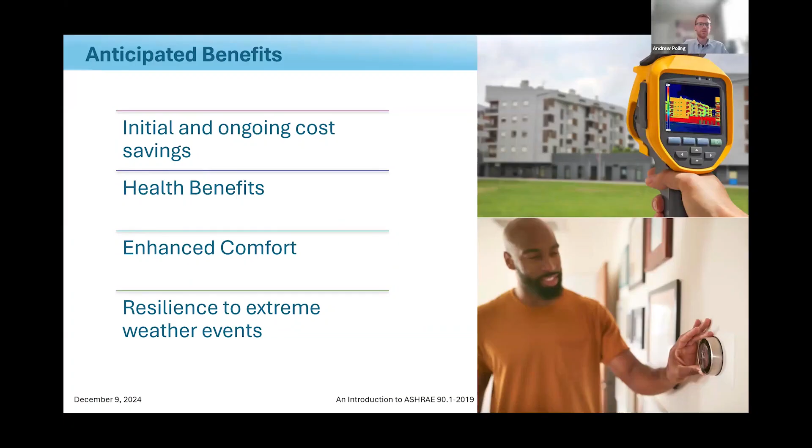Here we have the estimated savings for ASHRAE 90.1 2019. This standard is 22.5% more efficient than the 2007 standard, which was HUD's previous requirement. In aggregate, energy savings are estimated at $1.1 million per year, or up to $53 million over the 30-year life cycle.

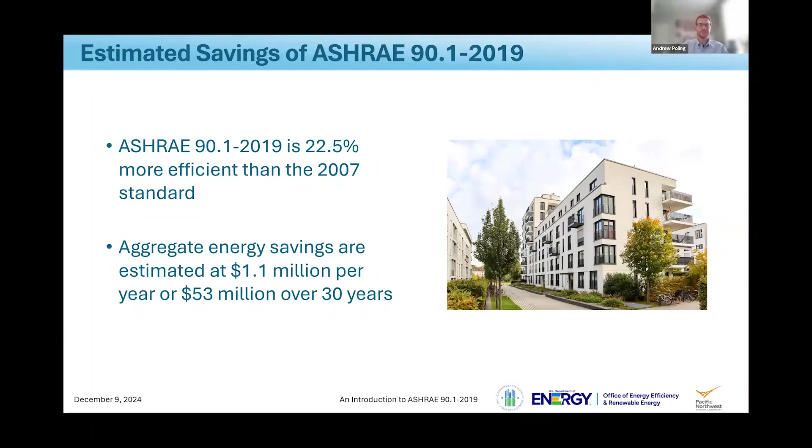Alternative compliance pathways - we're also looking into and going to release a list of alternative compliance pathways to meet this standard. Industry is already building to standards that meet or exceed the 2021 IECC or ASHRAE 90.1 2019. Programs such as the low-income housing tax credit qualified allocation plans often require or incentivize high-performance building standards, and then the IRA tax credits, which are available, reference building and require building to Energy Star program requirements or certifying to Department of Energy's Zero Energy Ready Homes program. So HUD and USDA will be publishing a list of high performance building standards that are accepted as alternative compliance pathways.

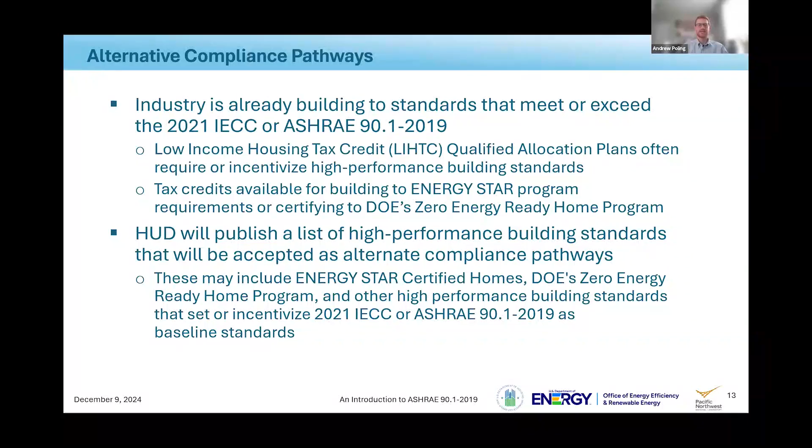Next, differences in state code adoption and HUD requirements. On the right, a U.S. map appears with a key labeled code efficiency category. Here we have a little bit on state code adoption and how it relates to the HUD requirements. Codes are adopted at the state or local level, and states often include amendments when adopting codes. This map, developed by the Department of Energy, shows the code efficiency category of each state's adopted code and takes into account any weakening or strengthening amendments that a state might have included to the unamended standard.

So this map shows which versions of the ASHRAE 90.1 standard states have adopted, taking into account impacts of weakening or strengthening amendments. We have 14 states that currently are at the 90.1 2019 version, plus the District of Columbia.

Just to walk through an example, I want to take Ohio, which has adopted the ASHRAE 90.1 2019 standard, however has done so with some weakening amendments. As a result, this map shows it as equivalent to the 2016 standard. In that case, the state code would not be seen as an equivalent performance level to the HUD and USDA requirement, so projects need to be building to that unamended ASHRAE 90.1 2019, or at least its equivalent performance level.

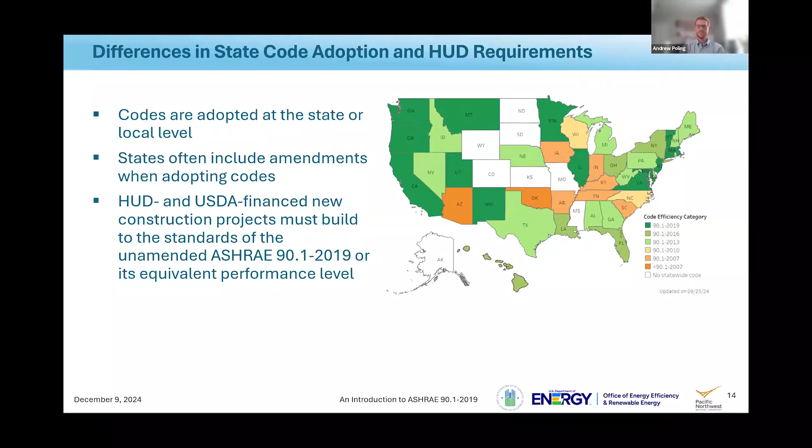So let's dive right in. DOE Building Energy Codes Program - a little bit of background on DOE's Building Energy Codes Program, which is the program I primarily support here at PNNL. It is funded by the Department of Energy, and the mission is to support building energy code development, adoption, and implementation to achieve the maximum practicable cost-effective improvements in energy efficiency while providing safe, affordable, and healthy buildings for occupants.

To achieve this mission, the Building Energy Codes Program's directive is to participate in development of energy codes, establish methodologies, and issue determinations to confirm energy codes result in energy savings, promulgate standards for federal buildings, and provide technical assistance to states and jurisdictions to implement their energy codes.

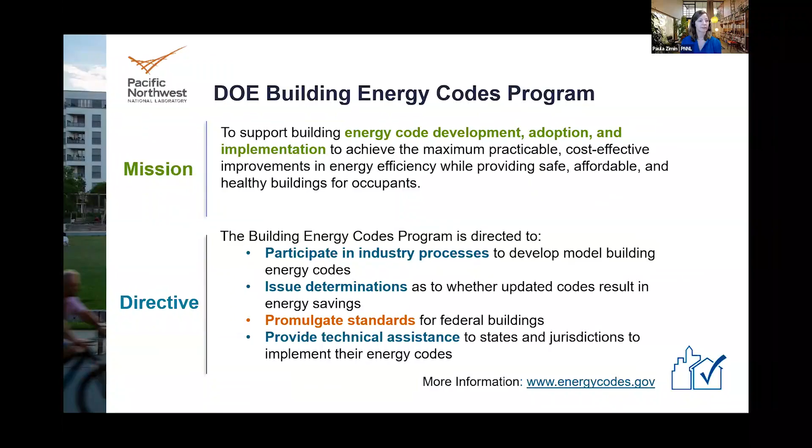What are energy codes? For those who don't work with energy codes as much as I do, you may be wondering what they are and how they relate to HUD's change in minimum energy standards. At their basic level, energy codes set requirements for minimum levels of efficiency for buildings and homes. They are adopted by states and/or individual jurisdictions along with other building codes. There are two predominant building energy codes in the US: ASHRAE Standard 90.1 and the IECC. Both codes are updated on a 3-year cycle.

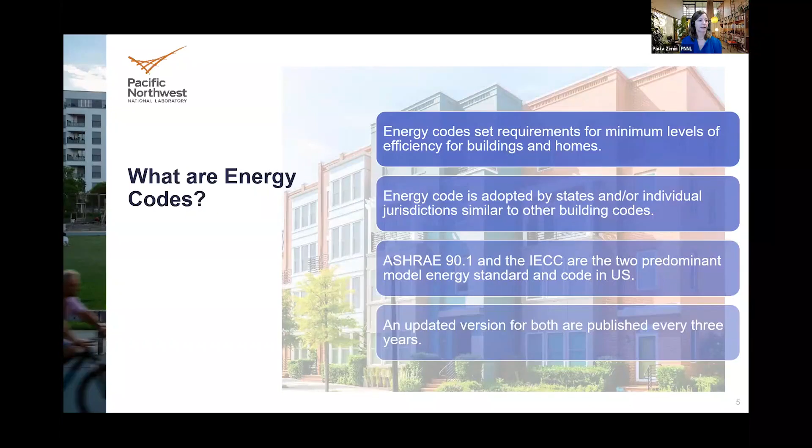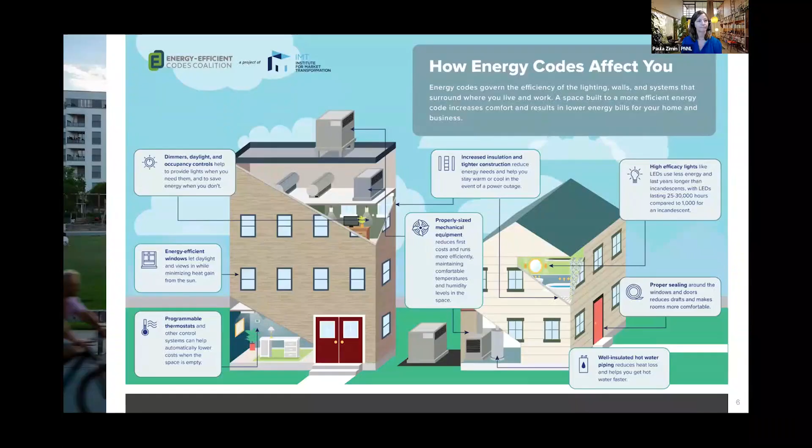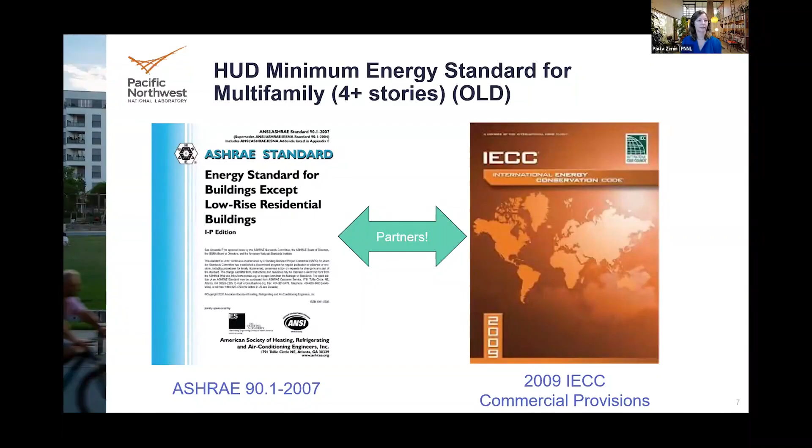The new HUD minimum energy standard is now Standard 90.1 2019 for multifamily buildings 4 stories or more. The partner energy code is the 2021 IECC, and as Drew mentioned, HUD will accept the 2021 IECC in place of 90.1 2019 since they're comparable energy codes.

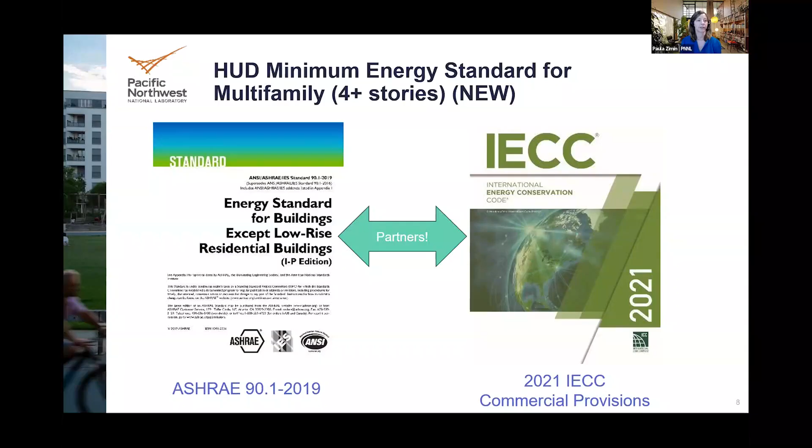Developers and contractors in states or jurisdictions whose energy code is older than the 2021 IECC or ASHRAE 90.1 2019 will need to become familiar with the differences of their local energy code, and we hope this overview can help with those larger changes.

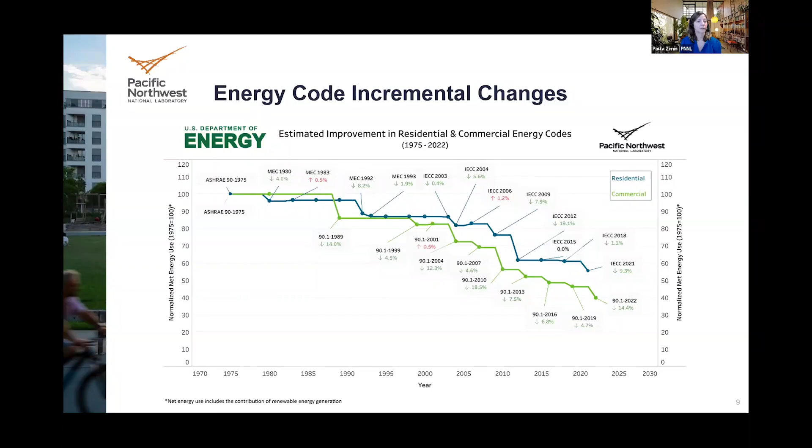The previous HUD minimum energy standard for mid-rise and taller multifamily buildings was ASHRAE Standard 90.1 2007. The net average energy use reduction across all commercial construction, not just multifamily, was 69.

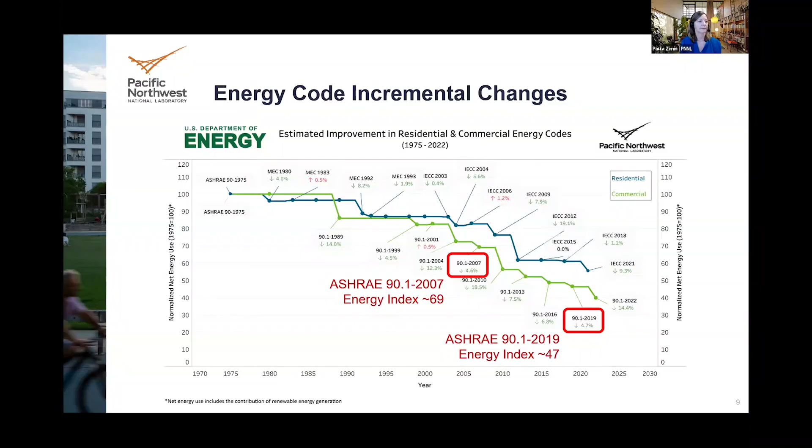A second red highlight appears. The new HUD minimum energy standard for mid-rise and taller multifamily buildings is ASHRAE Standard 90.1 2019. The net average energy use reduction across all commercial construction is approximately 47. So across all commercial construction, this is approximately a 30% reduction between the two standards.

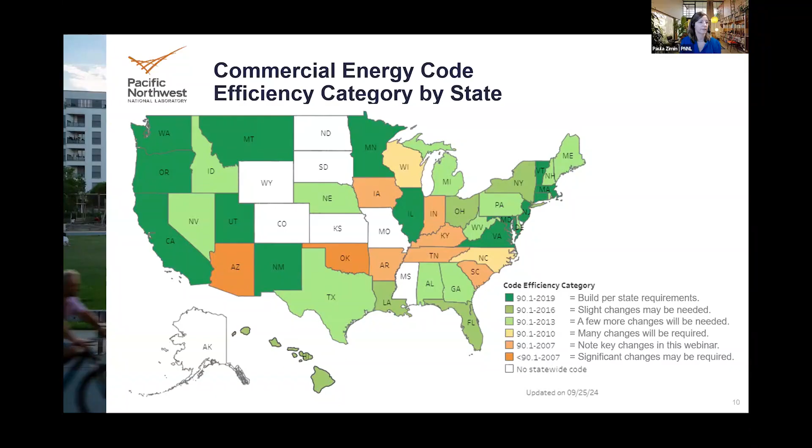States in yellow and orange will need to make more significant changes to comply with the new HUD minimum energy efficiency requirements. Yellow states include Wisconsin and North Carolina. Orange states include Arizona, Oklahoma, Arkansas, Iowa, Indiana, Kentucky, Tennessee, and South Carolina.

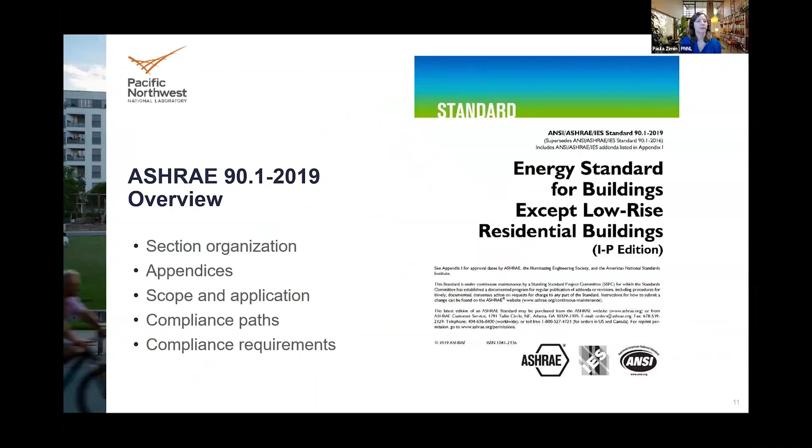ASHRAE 90.1-2019 Overview. All right, now we're going to focus more in on ASHRAE Standard 90.1 2019 specifically, and changes specific to section organization, appendices, scope application, compliance paths, and compliance requirements.

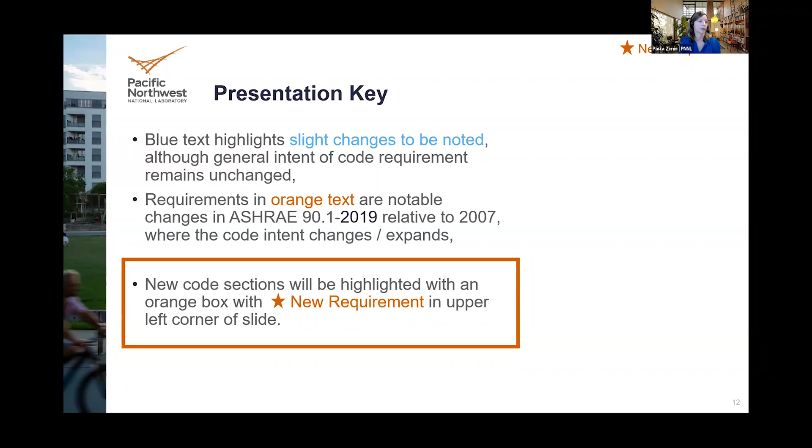So we can follow along in that way. No change in section organization. The organization of the main sections of ASHRAE 90.1 have not changed between the two versions. Sections 1 through 12. A box highlights system sections 5 through 10. Each section is maintained, and there's no significant changes, although I'll get into more detail about the system section changes relative to building envelope, heating, ventilation, and air conditioning, service water heating, power, lighting, and other equipment.

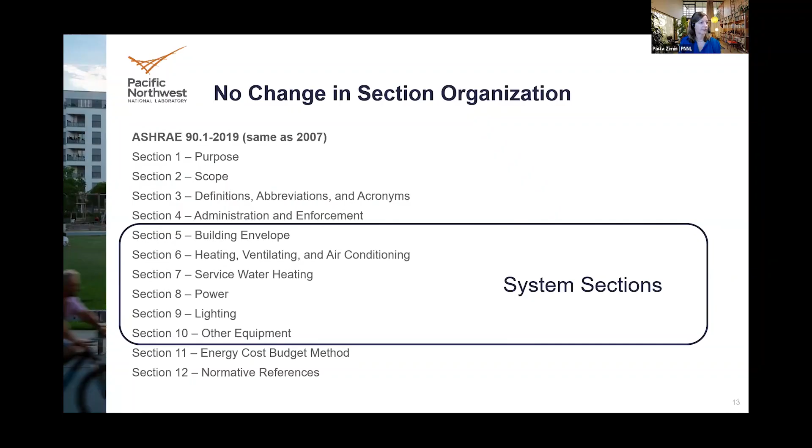Organizational changes and appendices. Although the main sections haven't changed, the standard's appendices have been rearranged a little bit. Appendices B and D previously discussed building envelope climate criteria as well as climate data, which is often referenced, and we'll reference that information in a little bit. But starting with the 2016 standard, ASHRAE replaced these appendices and started referencing an annex, which references ASHRAE Standard 169, which is the climate standard for ASHRAE.

Appendix F in the 2007 standard was updated and shifted to Appendix I in the 2019 standard, which just includes the detailed list of changes between the 2016 version and the 2019 version.

Paula sips from a water glass.

I'm speaking too fast. All right, and then there's two new appendices, Appendix F, which lists DOE's minimum efficiency requirements, and Appendix H, which provides additional guidance for verification, testing, and commissioning, which we'll talk about also in a little bit, new requirements.

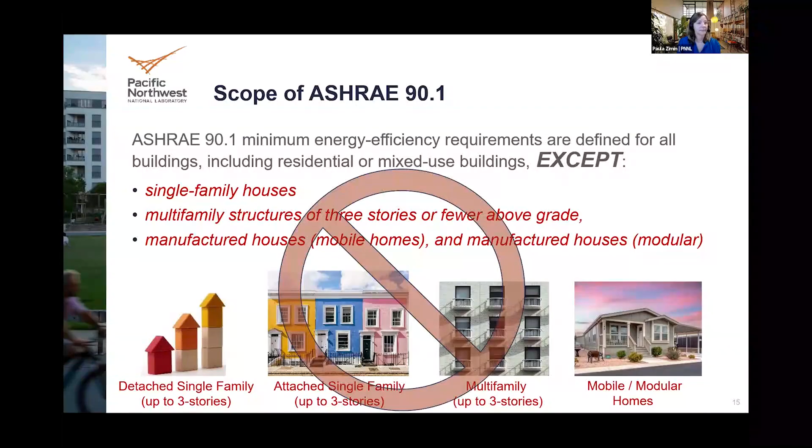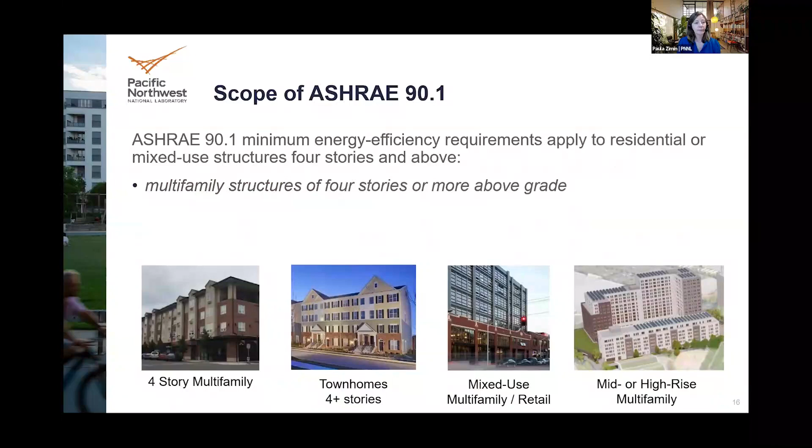Scope of ASHRAE 90.1. One important thing to note before we go any further is what ASHRAE 90.1 does not cover. ASHRAE 90.1 is a commercial building standard. It covers all buildings, including residential buildings, except for residential buildings that are single family, multifamily, 3 stories or less, or manufactured housing. So when I refer to residential buildings today or multifamily buildings, I am not referring to any of these building types: detached single family up to 3 stories, attached single family up to 3 stories, multifamily up to 3 stories, mobile or modular homes. When I refer to residential buildings or multifamily buildings today, I'm referring to any of these building typologies: 4 stories or more multifamily, mixed-use multifamily 4 stories or more, and the more obvious mid- or high-rise multifamily buildings.

ASHRAE 90.1 2019 Compliance Summary. A flowchart appears, labeled with the text, choose one compliance path. Okay, so for compliance with the standard, the structure hasn't really changed, but there are 2 key additions that we should highlight. Compliance, enter at section 4.2.1. First, all projects must comply as prescribed at the system level. That's step 1, section 5.2 through 11.2. And all projects must comply with mandatory provisions defined for each system, section 5.4 through 11.4.

This is the same as the 2007 standard. The first key change is that Appendix G, which is the performance rating method broadly used for above-code programs such as utility incentive programs or Energy Star, can now be used to show performance compliance with ASHRAE 90.1. The second significant change is a new requirement for verification, testing, and commissioning, an expanded concept from the 2007 standard, but now applies to each and every system regulated by the standard.

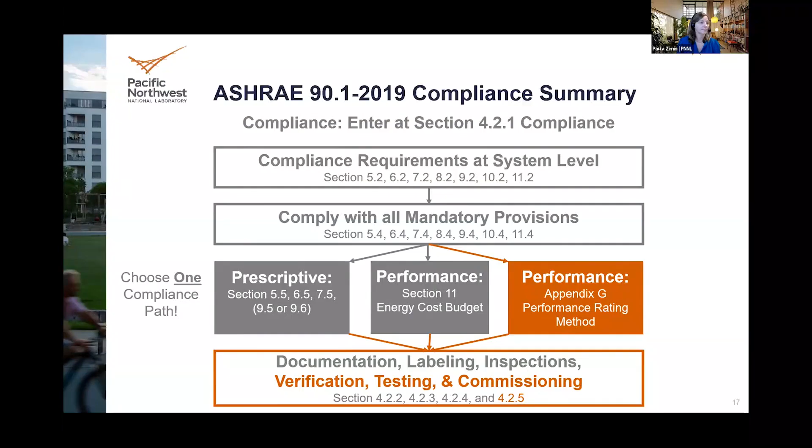Section 4.2.5 appears in orange.

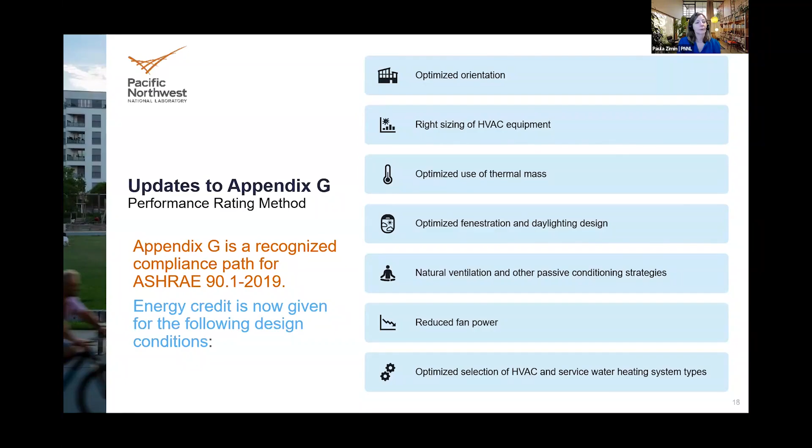A little bit more about the updates to Appendix G. Appendix G is not a new appendix, and it has been used by above-code programs since the early 2000s. However, Appendix G has gone through a reorganization since 2007, and there are now new ways to claim additional energy credit. Some examples include optimized orientation, right-sizing of HVAC equipment, optimized use of thermal mass, optimized fenestration and daylighting design, natural ventilation and other passive conditioning strategies, reduced fan power, and the optimized selection of HVAC and service water heating system types. In previous versions of ASHRAE 90.1, credit for these conditions was limited.

New verification, testing, and commissioning requirements, section 4.2.5. This is a new compliance section requiring verification, testing, and commissioning across all system types, further detailed in each building system section, 5.9.1 through 10.9.1. Each building system section defines specific requirements for verification, testing, and commissioning, and these are required regardless of the compliance path chosen, whether the prescriptive path or one of the two performance path options. Each performance path option also lists verification, testing, and commissioning requirements, 11.2d and G1.2.1c.

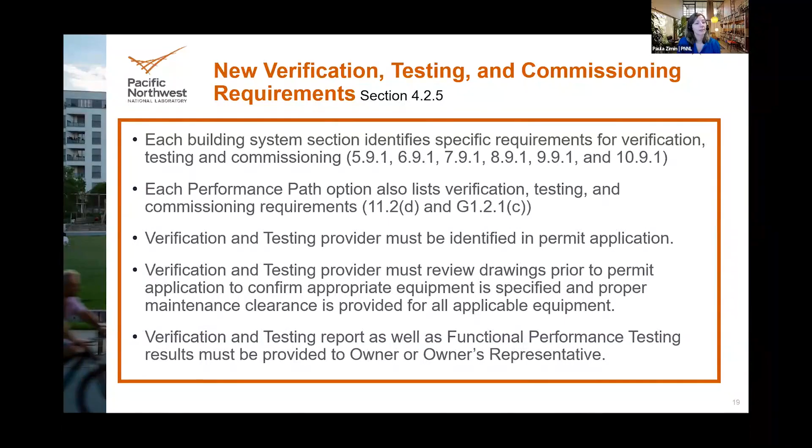The verification and testing provider must be identified in a permit application. This third party should have been involved during design to review the drawings prior to permitting, confirming appropriate equipment is specified and proper maintenance clearance is provided for all applicable equipment. Finally, a verification and testing report, as well as functional performance testing results related to commissioning work, must be provided to either the owner or the owner's representative.

New compliance documentation requirements, section 4.2.2.3, manuals. Finally, there is also an expanded documentation requirement related to operation and maintenance manuals. In previous versions of the standard, operation and maintenance manuals were only required for HVAC systems and power systems. Regardless of which compliance path, ASHRAE 90.1-2019 explicitly requires O&M manuals for each building system regulated by the standard. The manuals should meet industry standards as identified by references specific for each section identified in Appendix E.

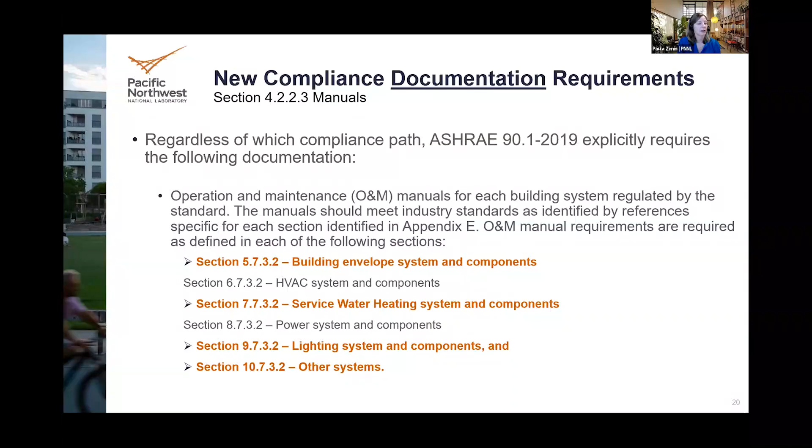Now, operation and maintenance manuals are required for all other systems, including the building envelope, service water heating, lighting, and other systems regulated in Section 10. Operation and maintenance manuals are invaluable to building operations and facility managers, particularly with turnover of staff and succession. We want to keep track of required operation and maintenance processes and a clear list of replacement details for ongoing efficient operation of the building.

In Section 5, for building envelope, there's a new requirement for a continuous air barrier as well as leakage testing, along with updates to vestibule requirements and prescriptive R-value and U-value updates.

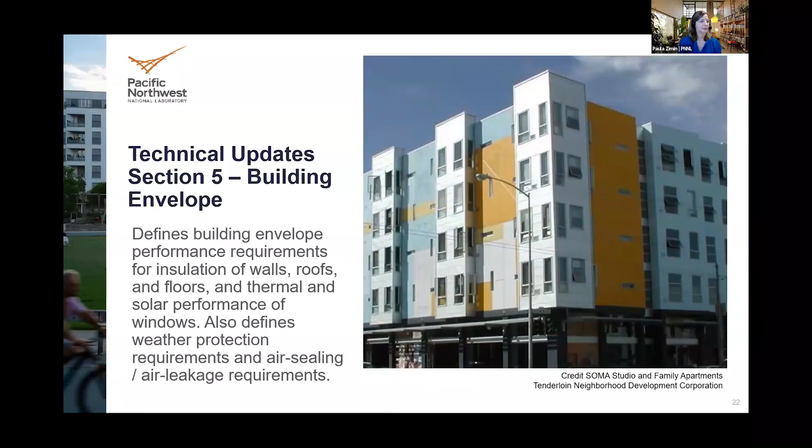5.4.3.1 Continuous Air Barrier, previously Building Envelope Sealing. A key subsection that has changed pretty significantly is the air leakage section. The previous building envelope sealing subsection has been renamed Continuous Air Barrier.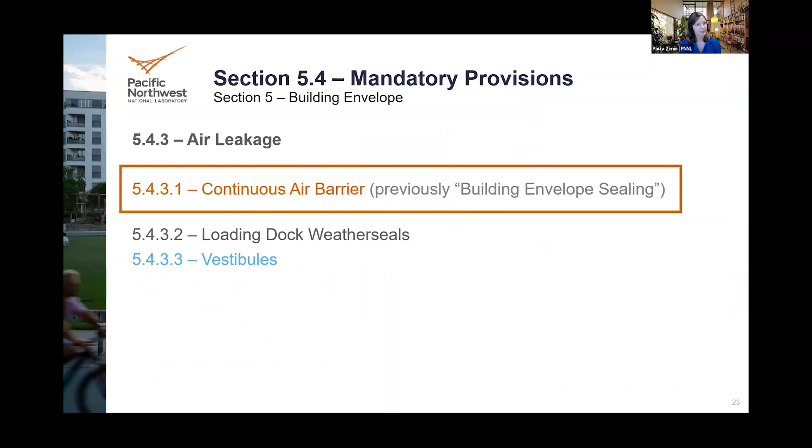Loading dock weather seal requirements are largely the same, but there is an update to the vestibule requirements. So let's take a look at that. Continuous Air Barrier Section

In the 2007 standard, building envelope sealing was prescriptive, specific to sealing at joints and junctions and other building envelope penetrations. The new continuous air barrier subsection specifically requires an air barrier component within each of the building envelope assemblies, as well as continuous transition at openings and intersections.

Further, there must be an overlap where the air barrier material changes, and the air barrier must resist all building pressures, either from the exterior or interior. In this way, no one material can be relied upon to be the air barrier.

One way a design team can design a continuous air barrier is to draw a continuous line around a building section representing the air barrier system, as shown with the green line in this building section. At each intersection of different components, such as at building overhangs, window openings, or roof transitions, the details in these locations should show what components make up the air barrier and how they will overlap to maintain continuity.

https://www.swinter.com/about-us/news/news-item/air-sealing-guides. The 2019 standard maintains the majority of the 2007 standard's prescriptive sealing requirements at joints and junctions. In the continuous air barrier design and installation section, the requirements are slightly modified to better integrate with the continuous air barrier requirement.

Text: E. The following areas of the continuous air barrier in the building envelope shall be wrapped, sealed, caulked, gasketed, or taped in an approved manner to minimize air leakage. 1. Joints around fenestration and door frames. 2. Junctions between walls and floors, between walls at building corners, and between walls and roofs. 3. Penetrations through the continuous air barrier in building envelope roofs, walls and floors. 4. Building assemblies used as ducts or plenums. 5. Joints, seams, connections between planes and other changes in continuous air barrier materials.

There are several available resources online to help understand multifamily whole building air sealing at the component level, as well as translating this to a continuous air barrier system. This example was prepared by an energy consulting firm, Steven Winter Associates.

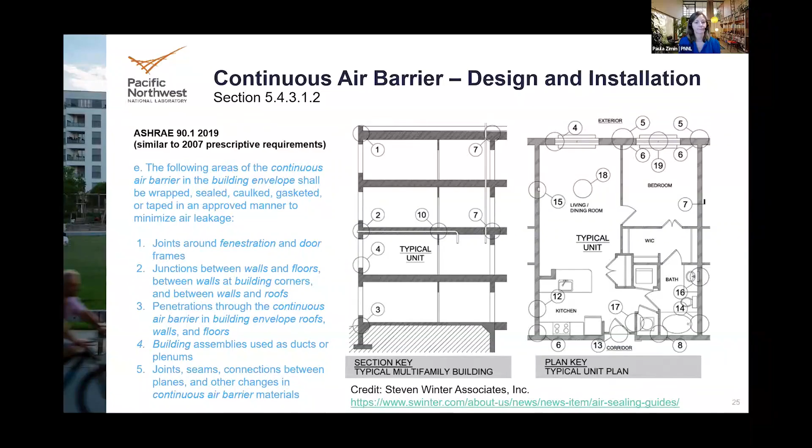They have prepared air sealing guides for 3 different multifamily construction types: masonry, steel, and wood construction, which cover common air sealing details found in the multifamily building typology. This link and other air sealing guides will be provided in a consolidated resource page at the end of this presentation. Whole building air leakage, section 5.4.3.1.1.

The new continuous air barrier subsection also requires testing of the system to confirm the installation achieves the intended performance. This is essentially one step in commissioning the continuous air barrier system. Testing of the continuous air barrier system is required in all climate zones.

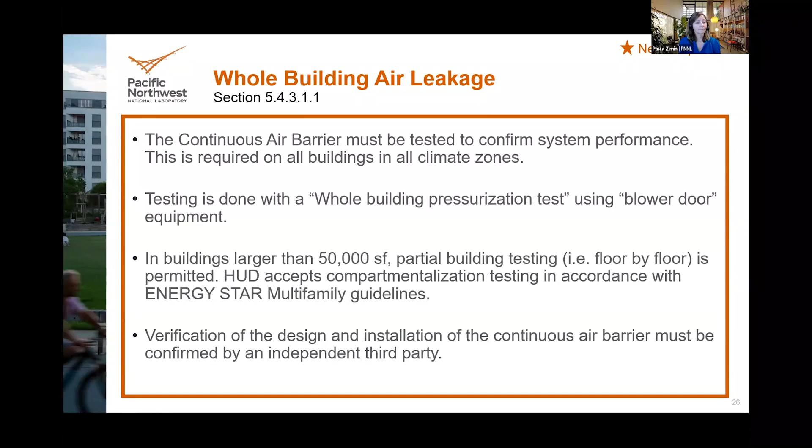Testing is conducted with a whole building pressurization test using blower door equipment. In buildings larger than 50,000 square feet, partial building testing, such as floor by floor, is permitted. HUD also accepts compartmentalization testing in accordance with Energy Star multifamily guidelines. The design and installation of the air barrier must be inspected and tested by an independent third party.

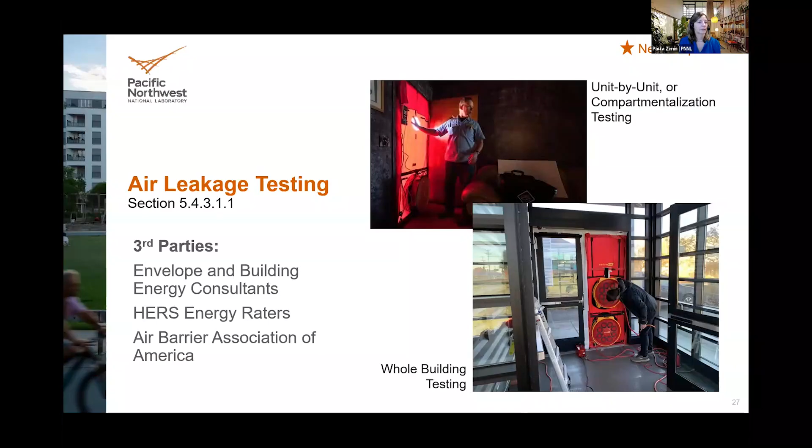The upper photo is set up in a dwelling unit. This testing is considered unit by unit or compartmentalization testing. The lower photo is a setup in the entrance to a building and is testing the air leakage of the whole building. Section 5.4.3.3, Vestibules and revolving doors, section 5, Building envelope.

Vestibules and/or revolving doors are required at building entrances. Building entrances include any doorway, set of doors, revolving door, vestibule, or other form of portal that is ordinarily used to gain access to the building or to exit from the building by its users and occupants.

The vestibule section has been updated to include revolving doors. The fundamental requirement has not changed. It's just that ASHRAE 90.1 recognizes that revolving doors achieve the same energy or equivalent energy savings as a vestibule.

Vestibules and/or revolving doors should be used at all building entrances. Building entrances include any main access point ordinarily used by regular occupants or visitors to access a building. The key change for a multifamily building is that vestibules or revolving doors are now required in all climate zones, no exceptions.

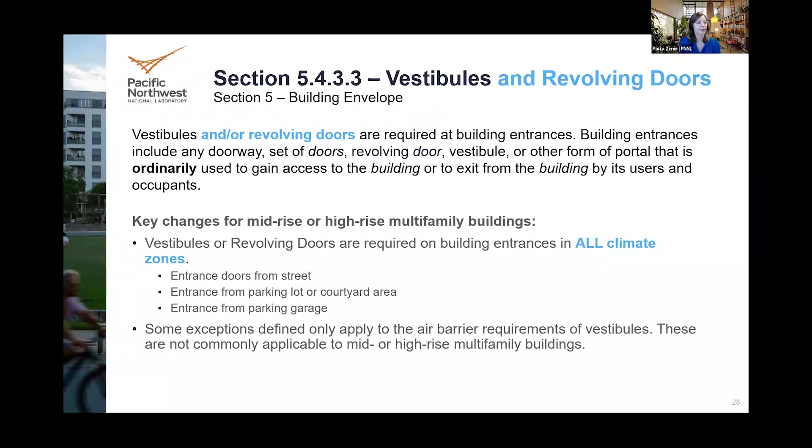Building entrances can include the main entry door from a street, potentially a back entrance from a parking garage or courtyard area, and entrances from a parking garage, perhaps to an elevator lobby. Some exceptions defined only apply to the air barrier requirements of vestibules. These are not commonly applicable to mid or high-rise multifamily buildings.

We're going to go into some insulation updates in a second, but before we do that, I wanted to share this map, which is, as previously referenced, from ASHRAE Standard 169, which identifies climate zones by county. If you do not know your climate zone, look for it here.

Climate zones are determined on a scale from 1 to 8, with 1 being more tropical and cooling dominated, found in Florida and Hawaii, for example, up to zone 8, which only exists in Alaska. That's a heating dominated climate.

In addition, climate zones are assigned a letter based on humidity. Higher humidity climates are assigned the letter A. This would include Omaha, Nebraska, or Oklahoma City, and extends east to Maine and Florida. The drier parts of the country are assigned the letter B and include eastern Washington, Oregon, and California, and extend over the Rockies and includes all of Montana, Wyoming, and Colorado. A sliver of the western states along the Pacific coast are considered marine and are assigned the letter C.

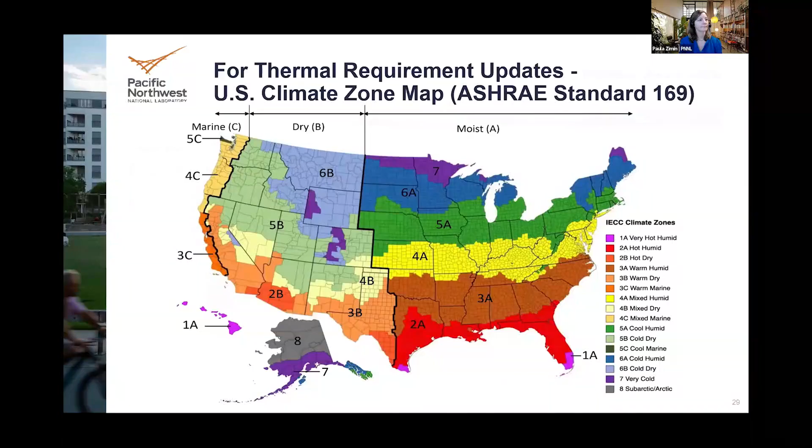There was a fundamental shift in categorizing windows first. Whereas in the 2007 standard, there were different performance requirements based on the material of the window frame, the 2019 standard ignores framing material, but offers a higher U factor allowance for operable windows versus fixed windows.

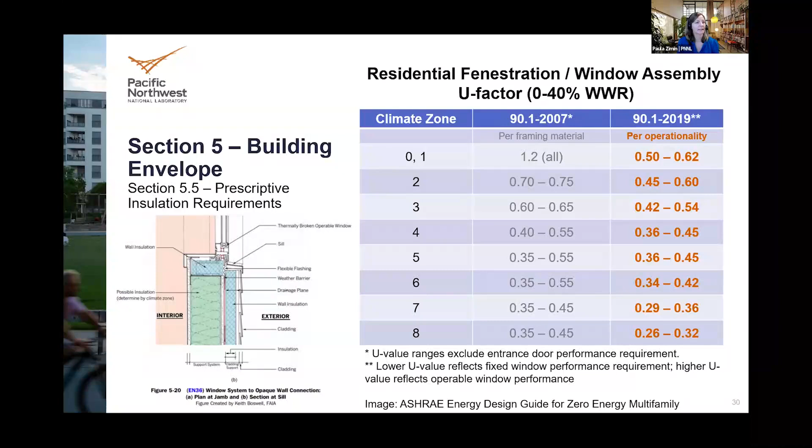Climate zones 1 through 3 see the greatest reduction in maximum U factor performance, with moderate decreases in maximum U factor performance from climate zones 4 through 8, within about a 1/10 reduction. Section 5, Building Envelope, Section 5.5, Prescriptive Insulation Requirements. Tables 5.5.5.0 through 8 define maximum fenestration to gross wall area ratio as 40%.

To the right, several buildings cluster in a photo.

Section 5.5.4.5 is a new section that puts limits on fenestration, or window area, of east and west oriented fenestration. For prescriptive compliance, east and west facades cannot have a fenestration area exceeding 25% of the gross exterior wall area of that specific orientation. There are adjustments that can be made to this restriction with improved solar heat gain coefficients or shading. This restriction may be most impactful to urban infill projects, which may have little option around window orientation.

Text, image credit, MAP Architects. This photo is of an urban infill building and shows an east-facing facade that exceeds 25%. To meet the new requirement, the solar heat gain coefficient will need to be reduced or shading provided to the windows to minimize heat gain from low sun angles that occur in the morning and evening.

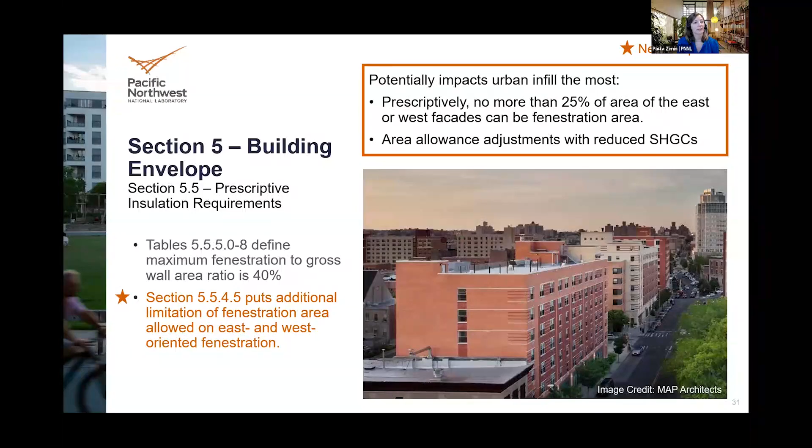Section 5 Building Envelope, Section 5.5 Prescriptive Insulation Requirements. On the left, a diagram represents the junction of a roof and wall. On the right, a table titled Attic and Other R Value. Image, ASHRAE Energy Design Guide for Zero Energy Multifamily.

Here are updates to attic insulation prescriptive requirements. There have been no changes in climate zones 1 to 3; those remain at an R38 insulation level. Climate zones 4 to 6 have increased from R38 to R49. Climate zone 7 increased from R38 to R60. And climate zone 8 increased from R49 to R60 as well.

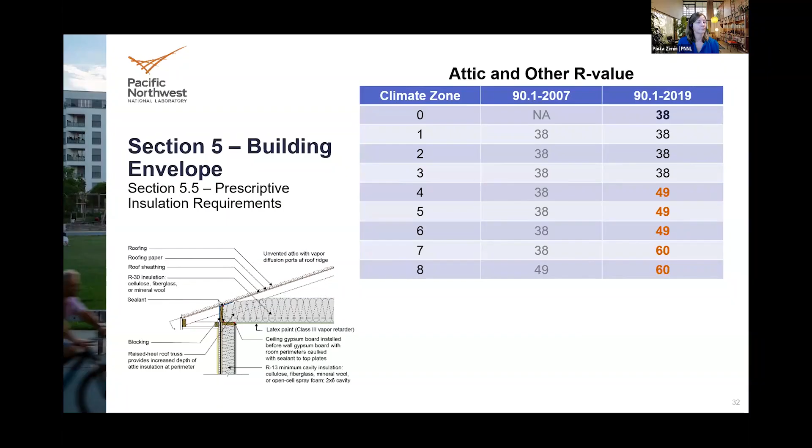Text, Section 5 Building Envelope, Section 5.5 Prescriptive Insulation Requirements. On the left, Figure 5.8, EN30 Roof Drain Insulation, figure created by Keith Boswell, FAIA. On the right, a table titled Insulation Entirely Above Deck Roof R Value. Image, ASHRAE Energy Design Guide for Zero Energy Multifamily.

Across the board for insulation entirely above the roof deck, so this will be flat or structurally sloped roofs, the 2007 standard had R20 continuous insulation as the minimum value. Standard 90.1-2019 increases this to R25 in zones 1 to 3, R30 in zones 4 to 6, and R35 in climate zones 7 and 8.

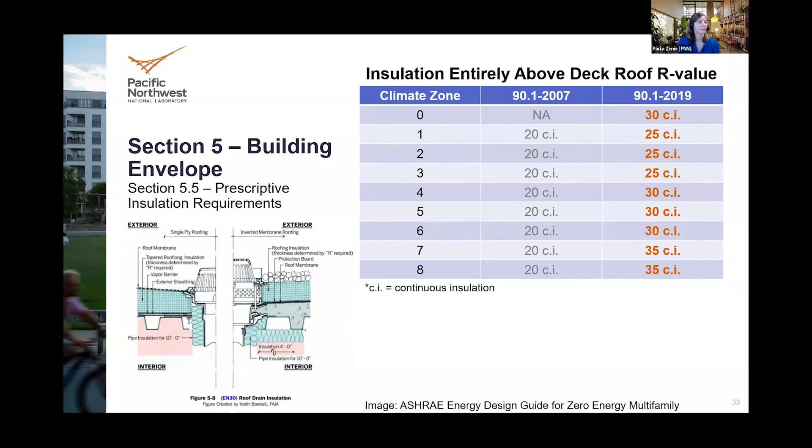Text, Section 5 Building Envelope, Section 5.5 Prescriptive Insulation Requirements. On the left, Figure 515, EN34 Wall Masonry Attachment Cladding Lateral Support, figure created by Keith Boswell, FAIA. On the right, a table titled Wood Frame Wall R Value. Image, ASHRAE Energy Design Guide for Zero Energy Multifamily.

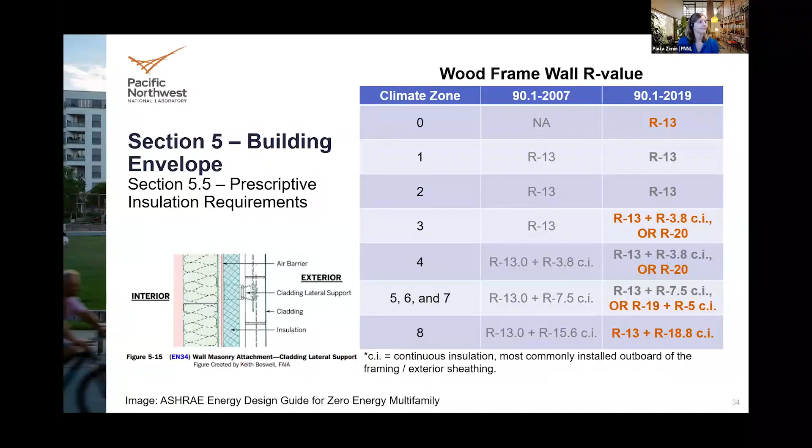For wood-framed walls, prescriptive insulation requirements increased slightly in climate zone 3, raising standalone cavity insulation to R20, and in climate zone 8, increasing continuous insulation from R15.6 to R18.8. Climate zones 3 through 7 also include two prescriptive compliance options. In climate zones 3 and 4, a project can be compliant either with standalone cavity insulation of R20 or a combination of R13 cavity insulation and R3.8 continuous insulation. Climate zones 5, 6, and 7 also have two compliance options, but both require both cavity insulation and continuous insulation. Text, Section 5 Building Envelope, Section 5.5 Prescriptive Insulation Requirements.

On the left, a photo titled Closed Cell Spray Foam with Spray Applied Cementitious Fireproofing Layer. Credit, Building Science Corporation, buildingscience.com/documents/building-science-insights-newsletters/bsi-124-parking-garages. On the right, a table titled Mass Floor R Value, Above Parking.

Our last highlight of insulation requirement changes is with mass floors, often seen in multifamily construction above a parking garage. Insulation requirements for mass floors have increased across the board from zones 3 through 8. In climate zone 3, required continuous insulation increased from R8.3 to R10, and in climate zone 8, required continuous insulation increased from R16.7 to R23.

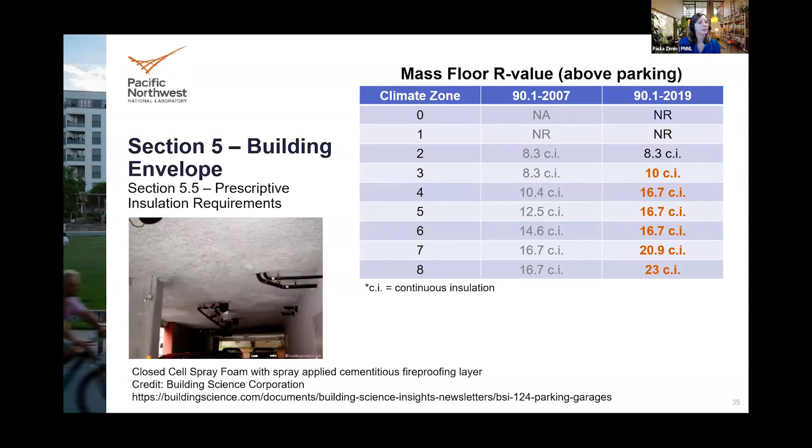Text, Technical Updates Section 6, HVAC. On the right, an HVAC system appears in a photo. Credit, multimechanical.com. All right, onto the technical updates for HVAC systems and equipment.

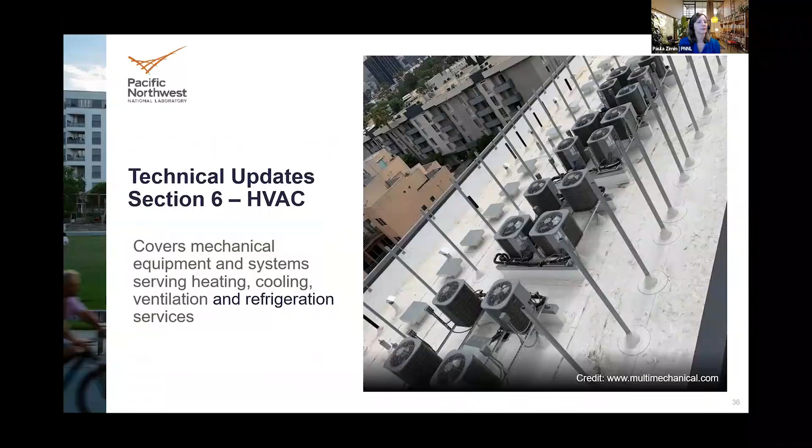This section covers mechanical systems serving heating, cooling, ventilation, and refrigeration services. Section 6, HVAC, Key Updates applicable to typical multifamily new construction. There are several updates in this category, and due to time limitations, I'm going to highlight four of them: updated requirements in ventilation design, energy recovery ventilation, vestibule heating and cooling, and minimum system efficiencies.

Some of the other notable updates that we don't have time for today relate to parking garage ventilation, insulation on ductwork and piping, load calculation and pump requirements, and efficiency requirements for fans and motors. Some information regarding these updates can be provided in an appendix when this presentation is shared later.

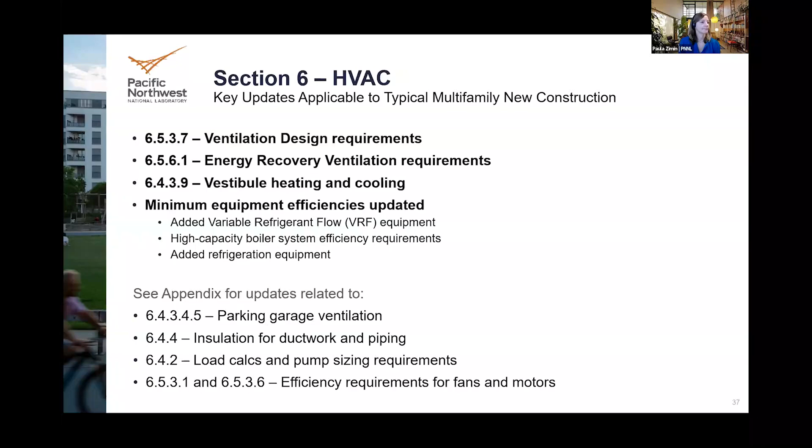New mechanical ventilation requirement, Section 6, HVAC ventilation design. Requirements for multifamily, Section 6.5.3.7.

Required minimum outdoor air rate is the larger of standard 62.1 for common areas and commercial areas in mixed-use buildings, and standard 62.2 for non-transient dwelling units. This requires a vented kitchen range hood, make-up air for dryers with exhaust, and mechanical outdoor air for each unit.

On the right, a diagram represents a mixed-use building with a portion that requires ASHRAE 62.2 for residential buildings and a portion that requires ASHRAE 62.1 for common areas or commercial spaces. Credit, ASHRAE 62.2 2016 User Manual.

So in the ASHRAE 90.1-2019 standard, section 6.5.3 outlines provisions for air system design and control. Some parts of the section relate to fan system power and efficiency and various fan controls. A new part within this section is ventilation design for a building.

Specifically, this new section requires compliance with ASHRAE 62.1, which is ASHRAE's ventilation standard for commercial buildings. For all common area spaces or commercial spaces in a mixed-use building, ASHRAE 62.1 is the appropriate ventilation standard. However, for dwelling unit ventilation, design teams should reference standard 62.2, which defines ventilation requirements for residential or dwelling unit spaces regardless of the height of the building.

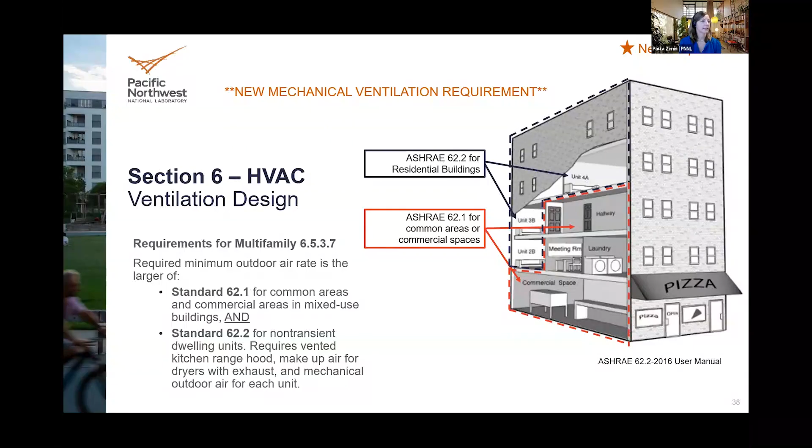62.2 regulates ventilation requirements in unit-only spaces, so those areas outlined in the dashed blue line would be for 62.2. On the diagram, a dashed blue line outlines the residential portion. Text: Ventilation Design, Section 6.5.3.7.

Also, in ASHRAE 62.2, the 2019 standard has a different definition for natural ventilation than the 62.2 2007 standard. Natural ventilation, as previously defined, is no longer a realistic compliance pathway for ventilation of a dwelling unit. Mechanical ventilation is required in all dwelling units.

Outdoor air ventilation systems shall comply with one of the following: the system includes exhaust air energy recovery complying with Section 6.5.6.1; dampers, ductwork, and controls shall be provided that allow the system to supply no more than the required minimum outdoor air rate with a single set point adjustment; or design minimum system outdoor air provided shall not exceed 135% of the required minimum outdoor air rate.

So while mechanical ventilation is critical for occupant health, it will necessarily increase energy usage. To minimize the impact of this increase in energy, this section includes additional requirements to either recover heat energy through an energy recovery system, or include additional air regulation controls to maintain the set outdoor air rate, or design the system so that it does not provide excessive outdoor air.

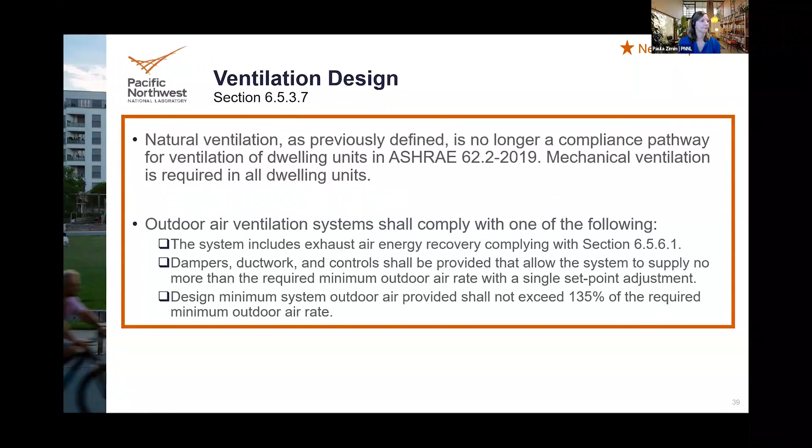Energy Recovery Ventilation Requirements, Section 6.5.6, Energy Recovery, 6.5.6.1.1, Exhaust Air Energy Recovery for non-transient dwelling units. Based on the required ventilation design air, ASHRAE has also defined energy recovery requirements for non-transient dwelling units, or long-term renters or owners who, by definition, occupy a unit for more than 30 days.

All dwelling units across all climate zones are required to have energy recovery ventilation, except for climate zone 3C, which is the central California coast, and units smaller than 500 square feet in climate zones 1, 2, 3A and 3B, 4C and 5C. The ERV system can be a unitary system or a centralized system.

Energy recovery ventilation transfers the heat from one airstream to another. The two streams are the exhaust air from the inside of a building and the fresh outdoor ventilation air. In colder climates, heat from warmer inside air can be transferred to colder incoming air to help temper it. Similarly, in warmer climates, warmer outdoor ventilation air can be cooled down through heat transfer with cooler exhaust air from inside the building. This heat transfer can reduce the heating or cooling load inherent to introducing outdoor air to a dwelling unit or building.

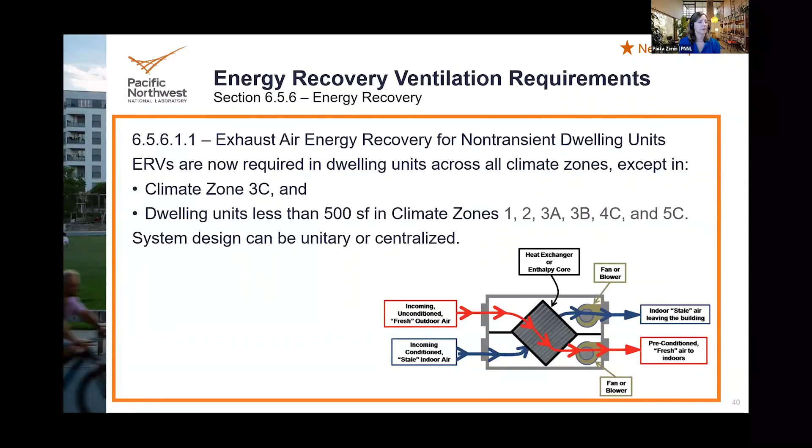If a project is required to provide energy recovery ventilation, this can be achieved with a centralized system that is ducted throughout a building, or from within each dwelling unit with a dedicated ventilator. There are pros and cons for each option. Key factors to be considered are impacts to floor area, electricity costs and who pays for what, and maintenance costs and schedule.

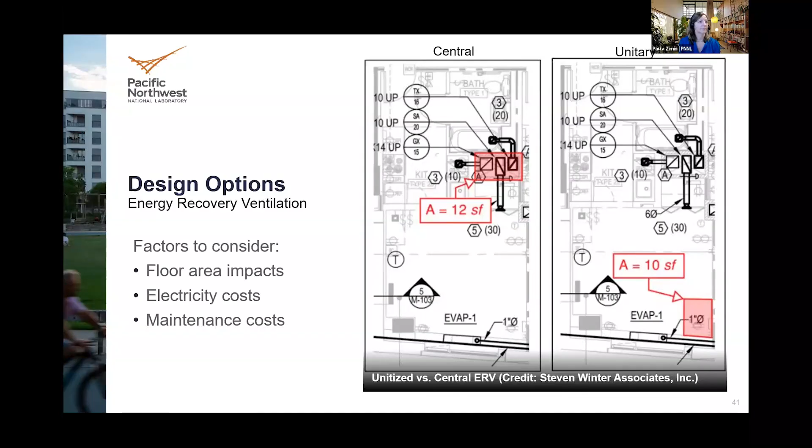I've included in the resources section a link to an article prepared by an energy consulting firm, Steven Winter Associates, discussing this comparison in more detail, which could help project teams figure out which one would be better for their project.

Another new requirement in Section 6 includes thermostat set point limitations for heating and cooling in vestibules. There is now a maximum set point of 60 degrees Fahrenheit in heating for vestibules, but that heat can only come on when it is below 45 degrees Fahrenheit outdoor air temperature. In cooling, you cannot set your thermostat in vestibules lower than 85 degrees Fahrenheit. There is an exception: heating or cooling provided by site recovered energy or transfer air that would otherwise be exhausted can be used for conditioning

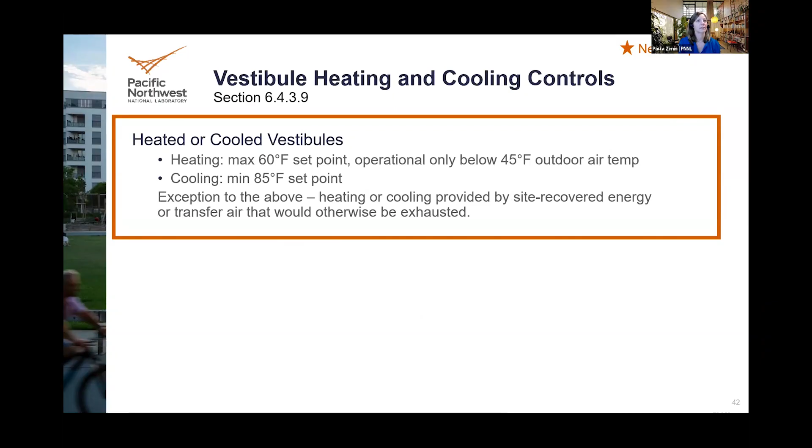Vestibules. Equipment Sizing and Efficiencies, Section 6, HVAC. Efficiency rating based on new testing procedures, not a one-to-one comparison by value alone. The last bit to the HVAC section is, across all systems, there have been updates to efficiency requirements. HVAC efficiency minimums cannot be traded off. All equipment must meet or exceed minimum efficiency requirements identified. Here are some examples of common HVAC systems found in multifamily buildings, both unitary systems within individual units, and central systems serving multiple apartments or a whole building.

We have a split system air conditioner and a furnace. The furnace's AFUE requirement has increased slightly to 80%. Thermal efficiency stays the same at 80%.

And for the cooling efficiency, the 2007 standard had 13.0 SEER. The 2019 standard has an updated SEER 2 rating of 13.4 required. They're going to be hard to compare because there's a different testing procedure between the two, but there's generally an increase in efficiency.

In a split system heat pump, there's a similar increase on the cooling side, an increase to 14.3 SEER on a split system heat pump for cooling. On heating, it looks like a reduction of efficiency, but again, the efficiency rating is based on a new testing procedure. So there should be a general increase in efficiency in the 2019 standard for heating in a heat pump.

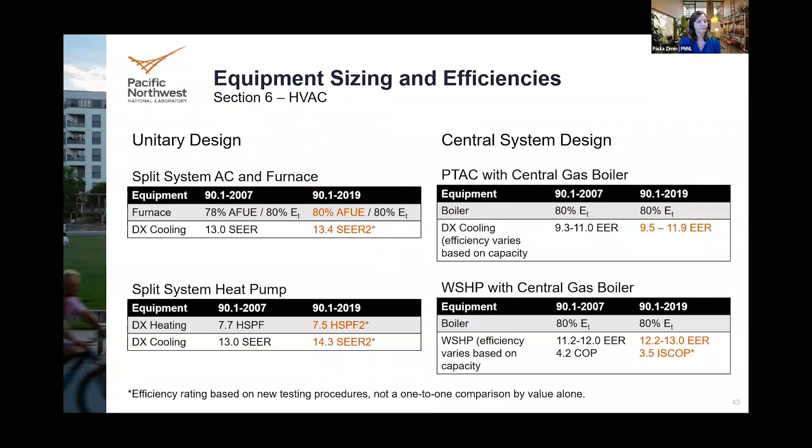Moving on to Section 7, which covers service water heating systems. In multifamily buildings, this system is actually more commonly identified as the domestic hot water system, providing hot water to faucets, showers, and clothes washers. There are minimal updates in this section, really focused on pipe insulation and equipment efficiencies.

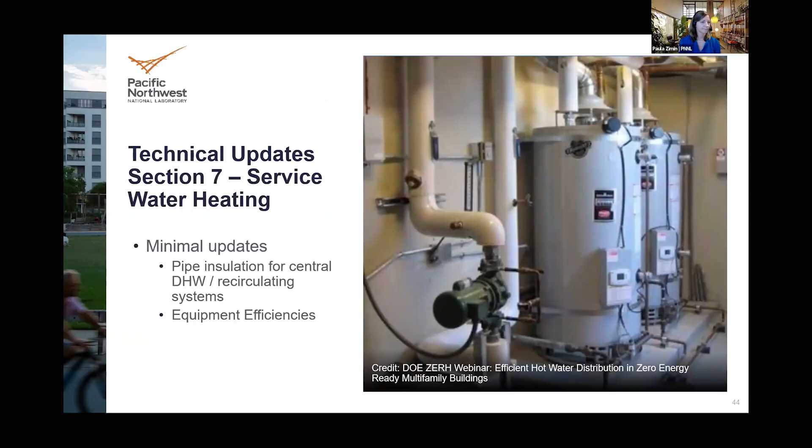Technical Updates, Section 7, Service Water Heating, Summary of Changes. Because there are fewer changes, I can walk you through how 90.1 changed through the years. There were no changes in this section in the 2010 standard. In the 2013 standard, there was an introduction of the high capacity service water heating systems that I just mentioned, which also exist in the HVAC section.

On a table, she refers to the 2013 section. This would apply to centralized domestic hot water systems with a very large capacity of 1 million BTUH or more. Again, it's not common, but hey, it might happen. In the 2016 code, there is a new requirement for insulation of the first 8 feet of branch piping connected to a pipe that is heated by recirculating hot water, heat trace, or impedance heated pipe. We're going to get into that a little bit. On the next slide, I have a detail that we can follow.

In 2019, there were some updates to minimum performance requirements for efficiencies. The efficiencies update was really done just to align with the federal minimum standards.

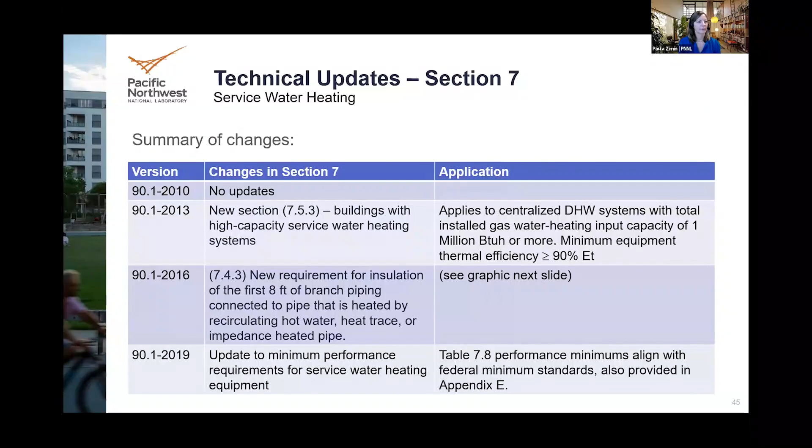SWH branch pipe insulation, Section 6, Service Water Heating, Figure 7b, Pipe Insulation Requirements, corresponding section Service Hot Water Piping Insulation, 7.4.3. Credit, ASHRAE 90.1 2016 User Manual.

The new insulation requirement for branch piping relates to recirculation systems in a central system in multifamily buildings. The heater, most commonly a boiler, sends hot water to a storage tank, and a recirculation loop snakes through the building to service the dwelling units.

Insulation has been required from the boiler to the storage tank, as well as on the recirculation loop, in the 2007 standard. What is new since the 2016 standard is that the branch piping, which branches off of the recirculation loop piping, must also be insulated for the first 8 feet of the branch pipe.

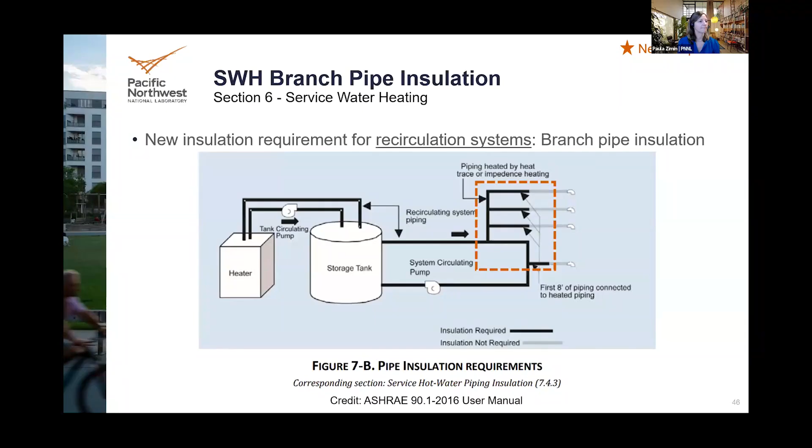The branch piping in this diagram is located within that dashed orange box. So that's a new requirement to insulate the first 8 feet of that branch piping.

First, there are new performance requirements for dry type transformers. If this is of interest to anybody out there, put something in the chat and we could talk about that a little bit further. There's also a new modification to voltage drop.

In the 2007 standard, feeder conductors were limited to a 2% drop and branch circuits were limited to 3%. By 2019, the standard recognized that electrical engineers could combine that limit as 5% total and no longer put limits on the individual parts of the distribution system.

There is also a requirement for automatic receptacle controls, which will likely only apply to something like a central office or business center in a multifamily complex. This requires 50% of non-essential outlets to have a central control switch to automatically turn off, either with a vacancy sensor or during non-business hours. So not as common in multifamily, but it could pop up.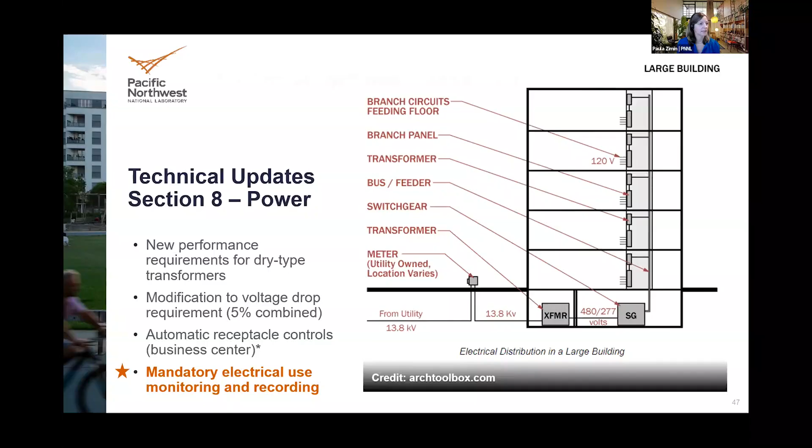And finally, and most importantly, there is a new requirement for electrical energy use monitoring and recording. So this is what I will discuss next. Technical Updates, Section 8, Electrical Energy Monitoring, 8.4.3, 8.4.3.1, Monitoring.

In a typical multifamily building, individual electric meters are usually provided for each dwelling unit. This isn't anything new. In addition to being separately metered, common areas greater than 10,000 square feet must also separately meter major building systems, including HVAC systems, interior lighting, exterior lighting, and receptacle circuits. So those all have to be metered separately from each other.

8.4.3.2. Recording and reporting. Also, in those common areas larger than 10,000 square feet, energy use must be recorded in 15-minute intervals and able to be reported in hourly, daily, monthly, and annual summaries.

In a mixed-use building with commercial tenant spaces greater than 10,000 square feet, these energy use reports must also be provided to the tenants. In multifamily buildings with digital control systems, such as a building automation system, the common area energy use data must be able to be graphically displayed. The building energy use data also must be maintained for at least 36 months.

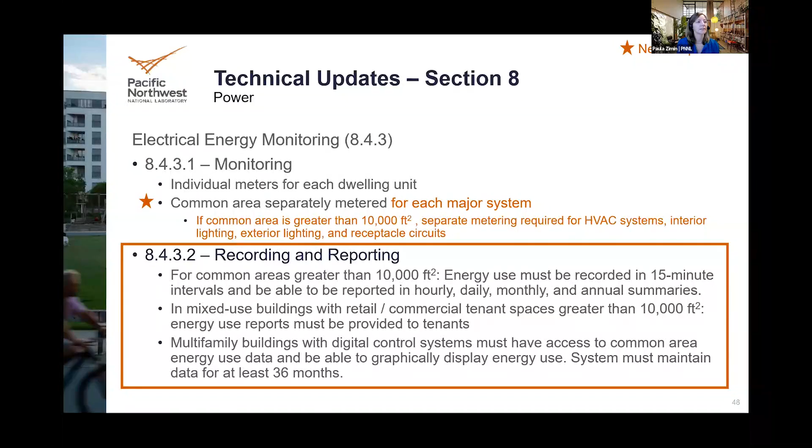Interior Lighting Efficiency and Controls, Section 9, Lighting, Dwelling Units, 9.4.3. First up is interior lighting. ASHRAE 90.1 version 2019 now explicitly regulates hardwired lighting in dwelling units.

At least 75% of permanently installed lighting fixtures in units must have either high efficacy lamps, defined as greater than 55 lumens per watt, or have a total luminaire efficacy of greater than 45 lumens per watt. In general, but not universally, LED lamps and LED fixtures will achieve the efficacy requirements here.

Additional updates have been made to lighting power density allowances, or LPD, by space type of at least about a 20% reduction. Committing to LED fixtures will also help achieve these lower lighting power densities. More significantly, there are additional control requirements in these common multifamily space types.

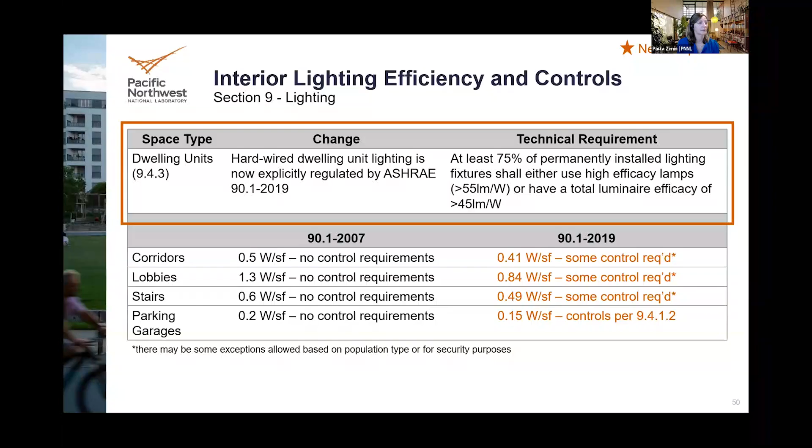I've given each zone my own personal alias here to help understand them better. Lighting zone 0 should be considered like a dark sky location, with 0 light pollution allowance - definitely in national parks, state parks, there's no light allowed on the site at all. Zone 1 is for rural spaces or developed areas on parks and national or state forests and otherwise rural lands.

I call Zone 2 the default zone, probably the most commonly used zone, particularly for residential construction. Zone 3 is a brighter version of Zone 2, so this could be in a downtown area and generally urban in nature. Zone 4 is sort of like zone 0 and should be very uncommon - this would be appropriate for a project located in the middle of Times Square or on the Vegas Strip.

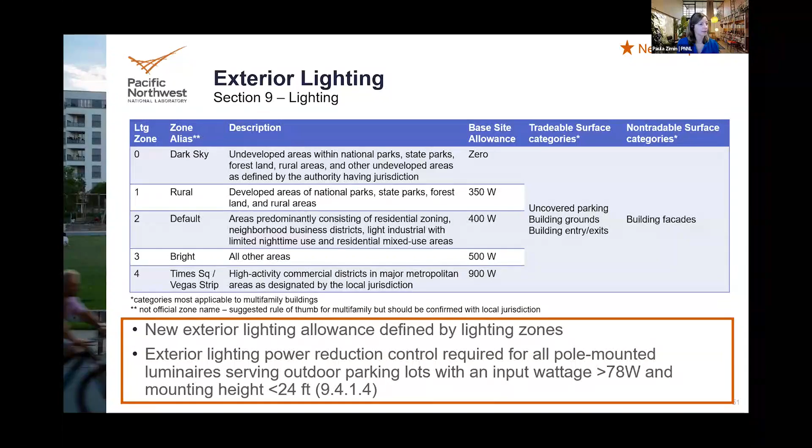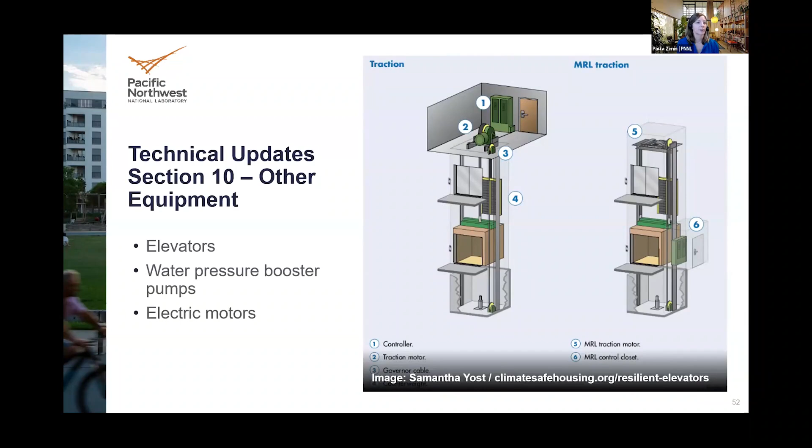On to our last system section, which is Section 10. It covers miscellaneous equipment such as elevators, water pressure booster pumps, and electric motors. Technical updates, Section 10, Other Equipment. Section 10 scope covers elevators, service water pressure booster systems, and electric motors.

There are updates to each equipment category as follows. For elevators, ASHRAE 90.1-2019 now regulates controls for elevator cab lighting and ventilation systems - both systems must de-energize when in standby mode. For water pressure booster pumps, the pumps have new control requirements to achieve the best efficiency point during operations.

And finally, electric motor efficiency requirements have been updated to reference DOE efficiency standards and no longer NEMA. This mostly impacts larger central ventilation fans or pumps.

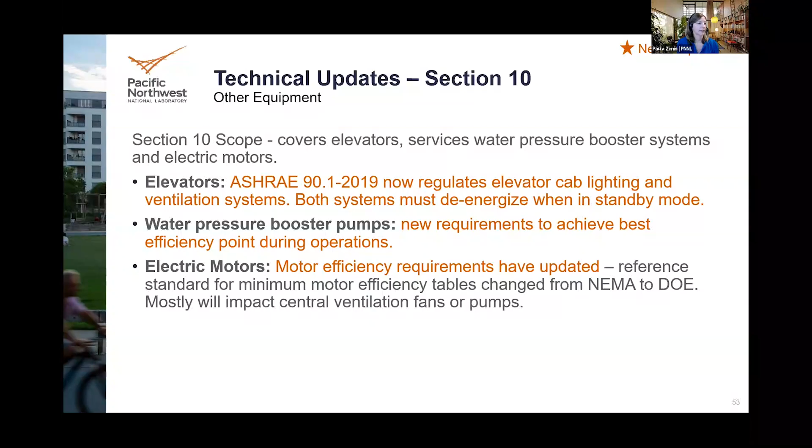Summary. All right, we did it. Did I lose you? Are you all still there?

So in summary, ASHRAE 90.1-2019 is the new HUD minimum energy standard. Everybody got that? Check. There are 3 compliance pathways - there previously were 2. One is prescriptive and two are performance pathways: Section 11 and Appendix G.

Each compliance pathway also now requires operation and maintenance manuals for all of those technical system sections, as well as testing, verification, and commissioning of each building system.

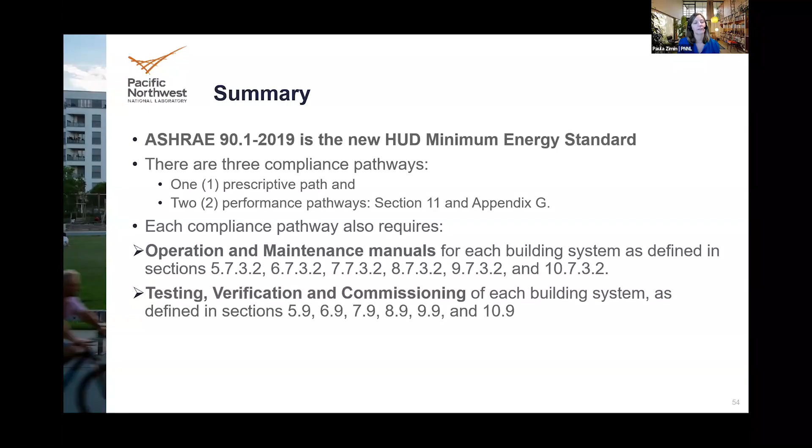Operation and maintenance manuals for each building system are defined in Sections 5.7.3.2, 6.7.3.2, 7.7.3.2, 8.7.3.2, 9.7.3.2, and 10.7.3.2. Testing, verification and commissioning of each building system are defined in Sections 5.9, 6.9, 7.9, 8.9, 9.9, and 10.9.

And then the key updates that we reviewed today are primarily: continuous air barrier requirement, as well as air leakage testing. Vestibules are now required in every building at main entrances. There are some updates to R-value requirements as well in the building envelope.

For HVAC, there's now updated ventilation design requirements, requirements for energy recovery ventilation in most climate zones, as well as vestibule heating and cooling limits. For service water heating, we've got those branch insulation requirements, as well as some equipment efficiency updates.

For power, for common areas greater than 10,000 square feet, we need to monitor that common area energy use by system type and be able to report out on it.

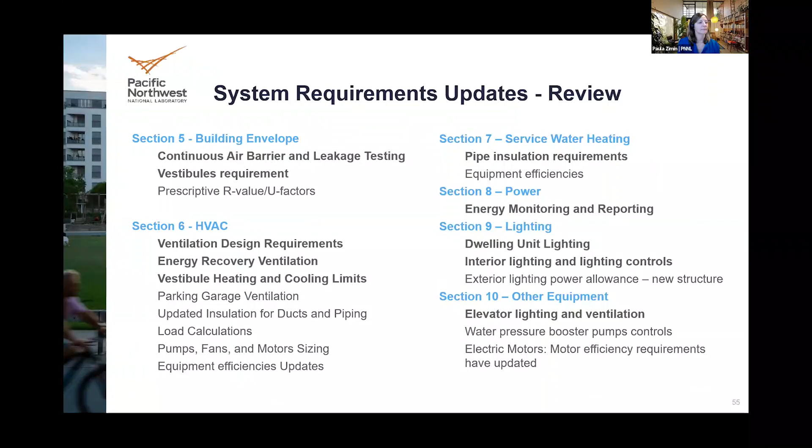And again, in the appendix, just because we're running out of time, we'll have some notes on the parking garage ventilation, updated insulation for ducts and piping, some notes on load calculations, pumps, fans, and motor sizing, and equipment efficiency updates within that HVAC section.

Resources, 1 of 2. The left column contains links to all systems and multifamily specific resources, and the right column contains links to building envelope resources. When this presentation gets published, you'll have access to these links relative to additional resources to help you get updated on ASHRAE 90.1 2019 and the new concepts that are within it.